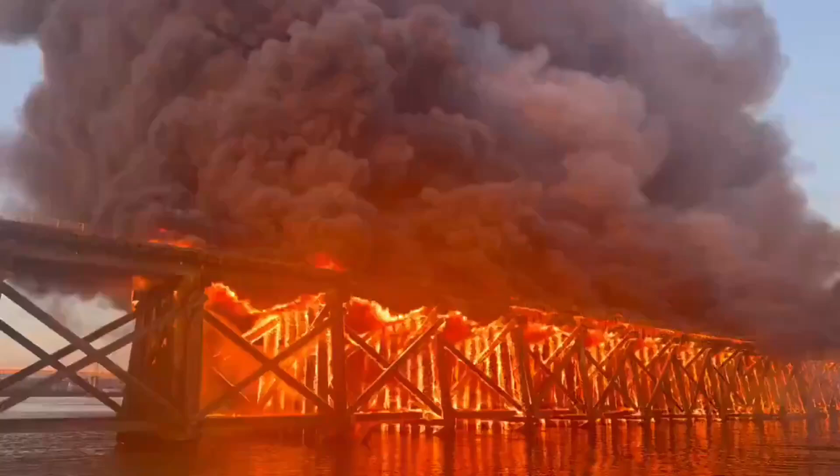From bridges cracking under pressure to collapsing in flames, these weren't unpredictable. They were preventable.

You won't believe what's waiting at number 5: a critical U.S. bridge built with a fatal engineering flaw that experts had warned about for decades, but it was ignored to save money. And number 6? It's the deadliest collapse on this list. One moment the bridge was there, the next, a bus full of passengers drove straight into open air.

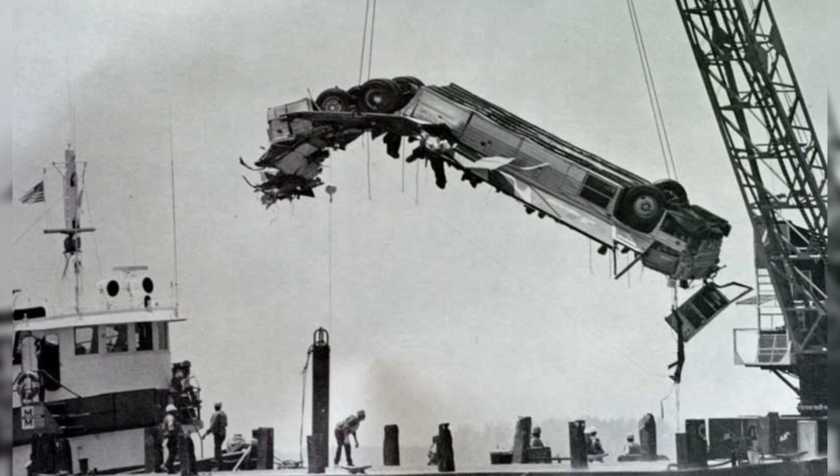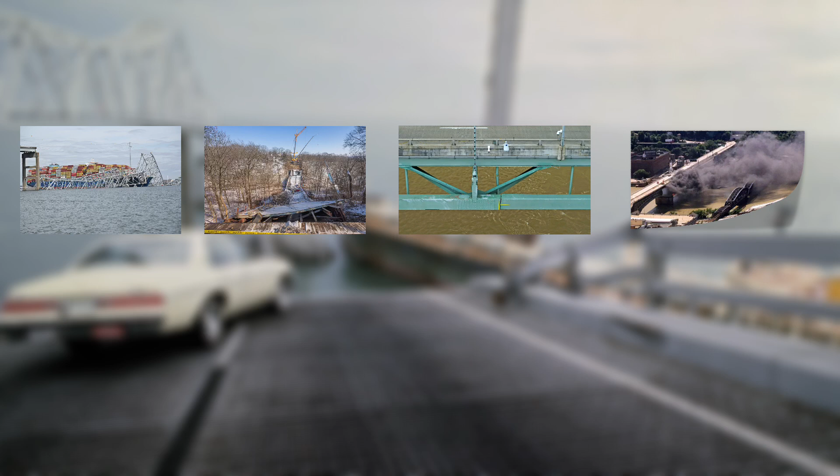When a ship crushed Baltimore's Key Bridge in 2024, one would have thought that we learned from that deadly 1980 bridge collapse. It is the latest in a disturbing pattern of U.S. infrastructure failures, failures that engineers warned about and were ignored. We'll break down 7 real-world bridge disasters in the U.S., examine exactly why they failed, and expose the systemic cracks in engineering, inspections, and accountability that continue to put lives at risk. This is more than a list. It's a wake-up call.

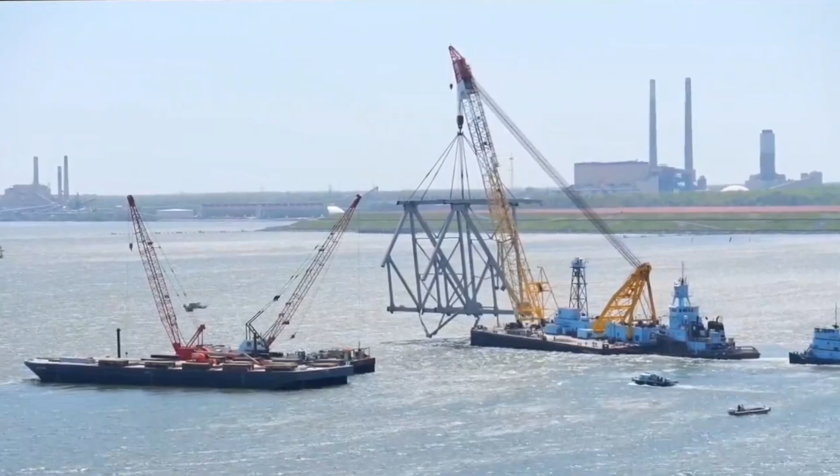The Francis Scott Key Bridge collapse, Baltimore, Maryland. It was just after 1:24 a.m. on March 26, 2024, when the container ship Dali, a 984-foot-long cargo vessel, experienced a full electrical blackout while exiting the port of Baltimore. With no power and no propulsion, the massive ship veered off course and slammed into one of the main support piers of the Francis Scott Key Bridge.

What followed was total structural failure. The bridge collapsed in a matter of seconds. Surveillance footage captured the horrifying moment as the structure folded into the Patapsco River like matchsticks. At the time of impact, a crew of 8 construction workers was repairing potholes on the bridge. Only 2 survived.

The Key Bridge wasn't some minor overpass. It was a 1.6-mile steel continuous truss bridge that had served as a vital artery for over 45 years, connecting Baltimore's port traffic to the I-695 Beltway. Built in 1977, it handled roughly 11 million vehicles annually. But despite its size and importance, its defenses were tragically outdated.

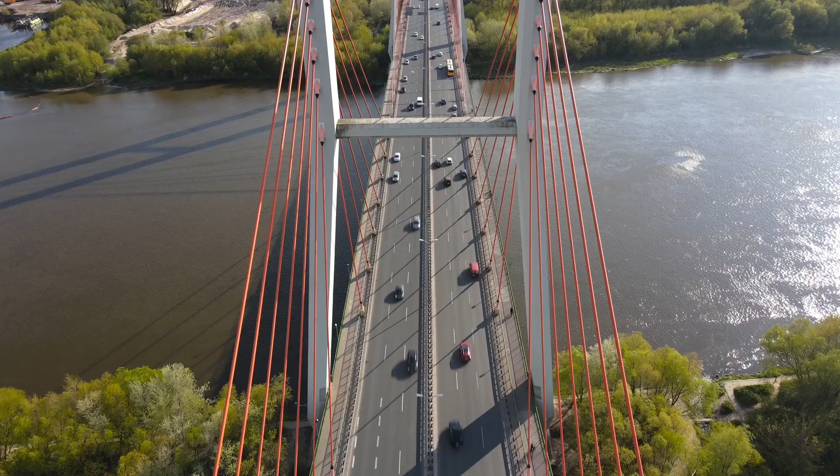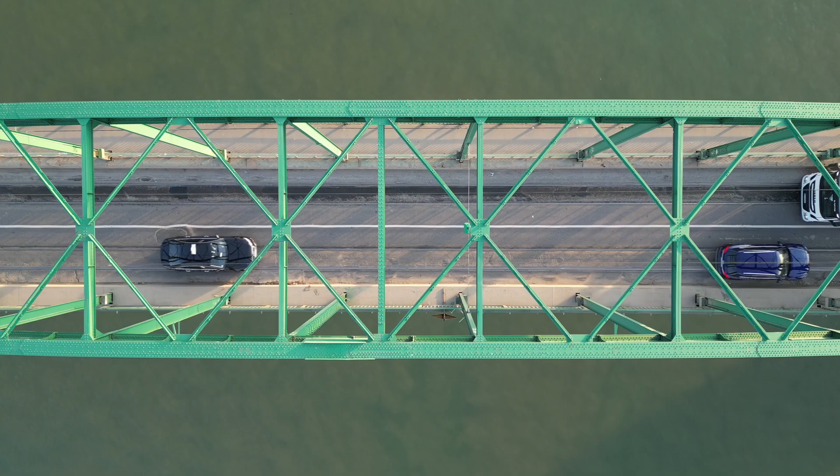Unlike many bridges in busy shipping corridors, the Key Bridge's support piers lacked marine fender systems, heavy-duty structures made of steel, concrete, or wood that surround piers and absorb the force of ship impacts. Ports like Tampa, New York, and San Francisco upgraded their bridges years ago. But in Baltimore, no such retrofit had been funded. This collapse wasn't an anomaly. It was the result of inaction, and one that cost 6 lives.

Fern Hollow Bridge collapse, Pittsburgh, Pennsylvania. It was a quiet Friday morning in Pittsburgh when everything gave out. At 6:39 a.m. on January 28, 2022, the Fern Hollow Bridge, a 447-foot-long structure crossing over a wooded ravine in Frick Park, suddenly collapsed without warning. A city bus, 5 passenger vehicles, and thousands of pounds of steel and concrete plummeted nearly 100 feet into the valley below. 10 people were injured, including the bus driver and several passengers.

The only thing that prevented fatalities was the timing. Rush hour hadn't yet peaked. The structure, opened in 1970, was a rigid steel frame bridge, a design that relies heavily on its legs and cross-bracing for stability. But by 2022, that same steel had been corroding for years.

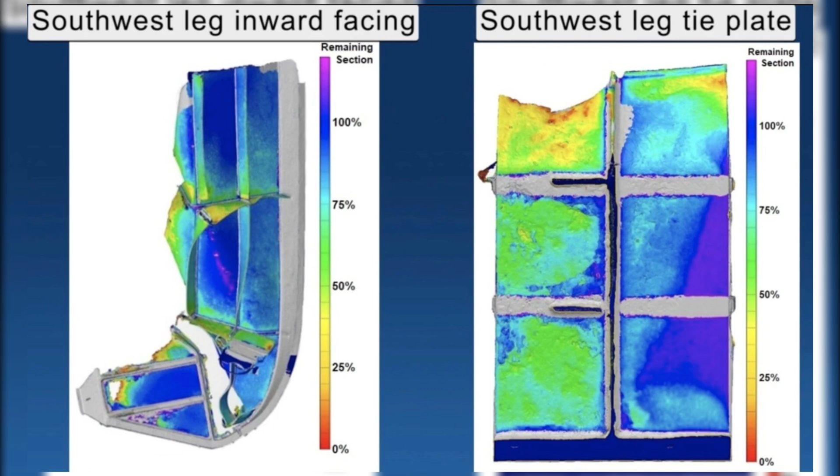Inspection records showed the bridge had been rated poor as far back as 2011, and that rating remained unchanged for over a decade. The NTSB's final report revealed just how close this bridge had been to failure for years. Critical load-bearing legs were severely rusted, and some connection plates had deteriorated to the point of detachment. Water intrusion, poor drainage, and a lack of consistent non-destructive testing allowed the decay to continue unnoticed, or worse, ignored.

What made the collapse especially damning is that the bridge had undergone routine inspections. It was last checked just 4 months before it failed. Yet without advanced tools like ultrasonic scanning or internal stress sensors, inspectors missed the most dangerous flaws. The bridge literally failed in its legs. These are the kinds of failures that can and should be caught.

Jennifer Homendy, NTSB chair: This wasn't some unpredictable fluke. Engineers had raised concerns for years, but the warnings were met with silence.

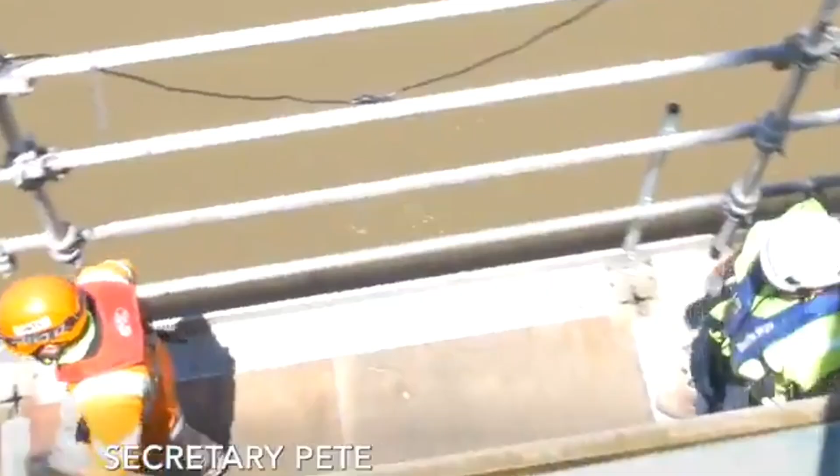Hernando de Soto Bridge crack, Memphis, Tennessee. On May 11, 2021, a routine inspection of the Hernando de Soto Bridge over the Mississippi River revealed something terrifying: a massive, 2-foot-long crack in a key load-bearing member. The fracture was found in a steel tension tie girding the central arch, one of the critical elements holding up the entire 3,800-foot structure. This wasn't just a small oversight. It was a near disaster.

The Hernando de Soto Bridge is a tied-arch bridge completed in 1973, carrying over 40,000 vehicles a day between Tennessee and Arkansas. The cracked component was a tension tie, a member that literally holds the arch in place under load. Had it failed completely, the result could have mirrored the I-35W collapse in Minneapolis, a full structural failure during peak traffic.

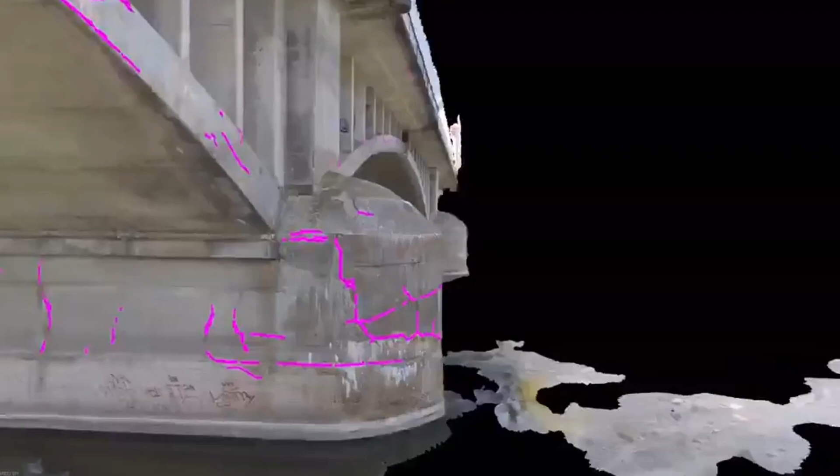The Tennessee Department of Transportation called it a near catastrophe. The NTSB later concluded that inadequate inspection procedures and human error were to blame. The event became a wake-up call. State DOTs across the country began rolling out drone-based inspections and AI-assisted crack detection to reduce human oversight failure. But the fact that such a large, obvious fracture went unnoticed for years revealed deep flaws in America's infrastructure monitoring.

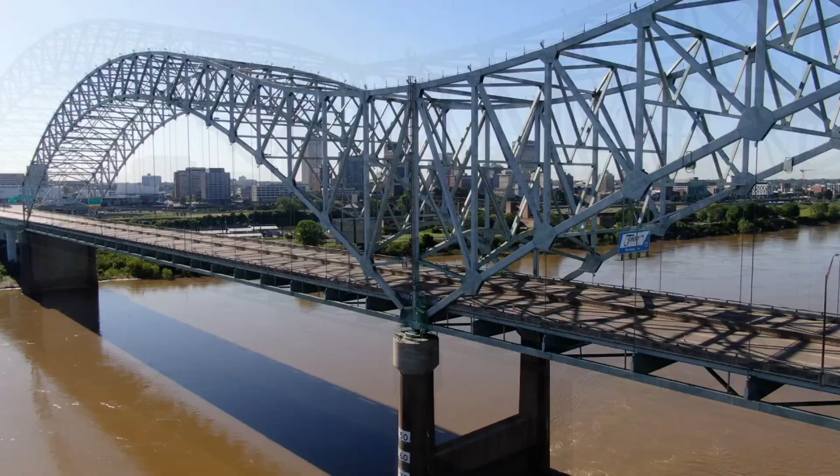It wasn't luck that saved this bridge. It was timing. Had it gone unnoticed a few months longer, the outcome might have made headlines for all the wrong reasons. The Liberty Bridge fire, Pittsburgh, Pennsylvania.

In September 2016, Pittsburgh came within inches of losing one of its oldest and most important crossings. The Liberty Bridge, a cantilever truss bridge built in 1928, spans the Monongahela River and funnels traffic directly into downtown Pittsburgh. It carries more than 50,000 vehicles daily.

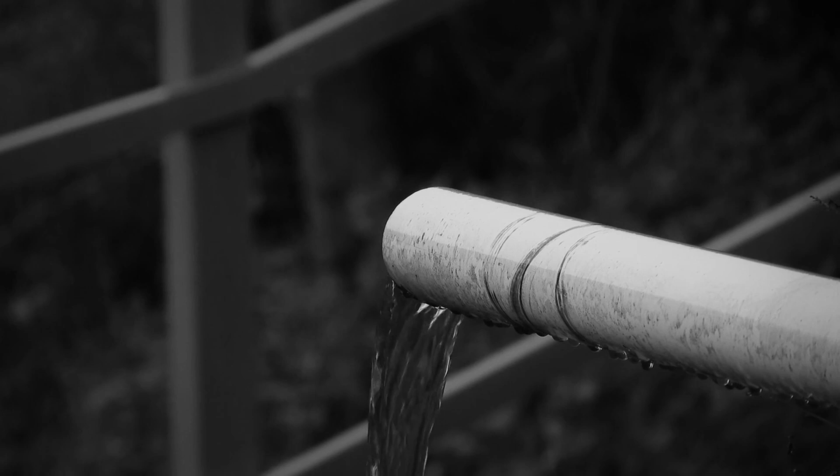But on September 2nd, during a routine rehabilitation project, a small oversight nearly triggered disaster. While contractors were using acetylene torches to perform welding work, sparks ignited nearby plastic ventilation pipes. The fire spread rapidly, creating intense localized heat that deformed a key steel tension chord, one of the elements responsible for keeping the bridge's span stable under load.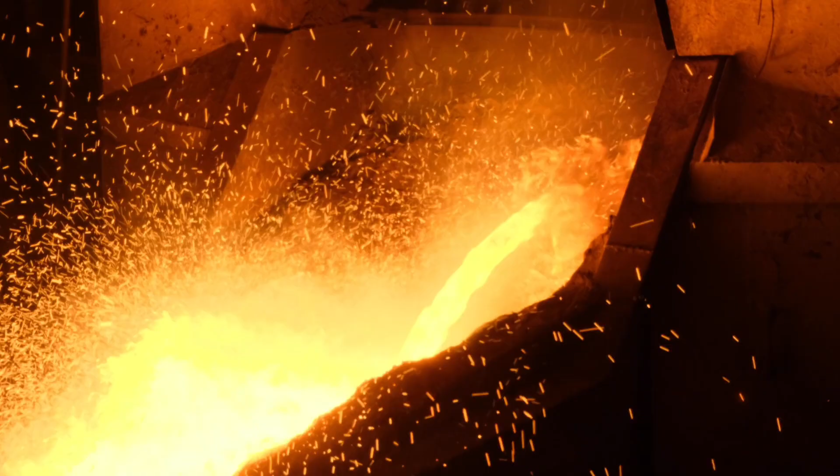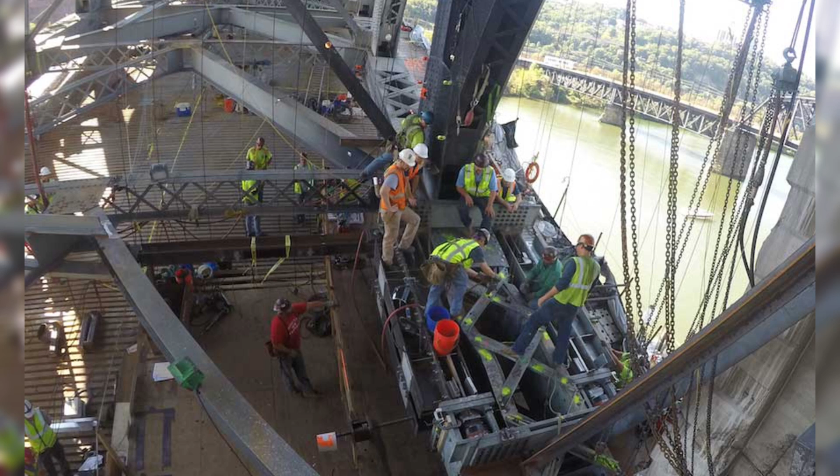According to PennDOT, the temperature reached levels high enough to warp steel. The bridge was immediately closed and underwent emergency repairs. Engineers installed a 9-ton steel brace to stabilize the damaged section while assessments were made.

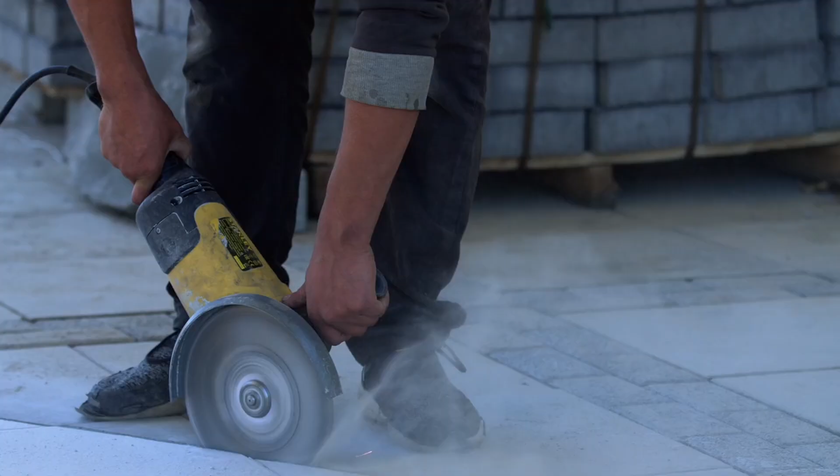The cost of the incident? Over $3 million in repairs, 24 days of emergency closure, and tens of thousands of daily traffic disruptions. But what's more concerning is what caused it: poor job site controls. Flammable materials had been stored too close to active torching, and there were no thermal shields in place, a violation of standard safety protocols.

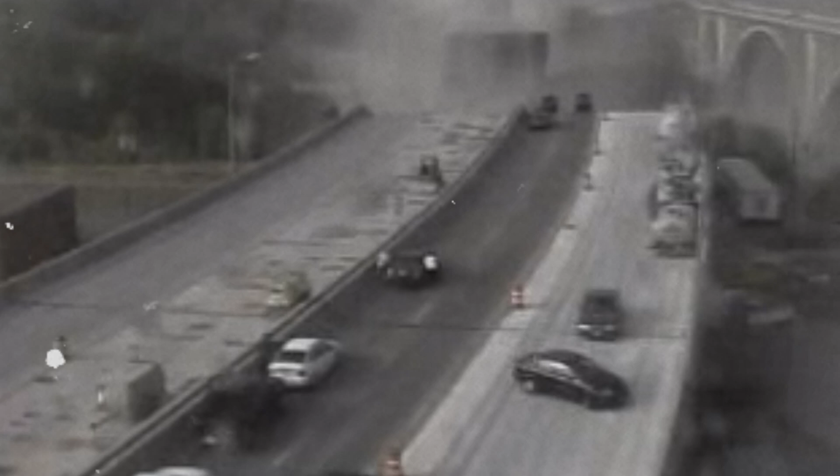The I-35W bridge collapse, Minneapolis, Minnesota. On August 1, 2007, just after 6 p.m., one of the busiest commuter bridges in Minnesota, the I-35W bridge over the Mississippi River, suddenly gave way.

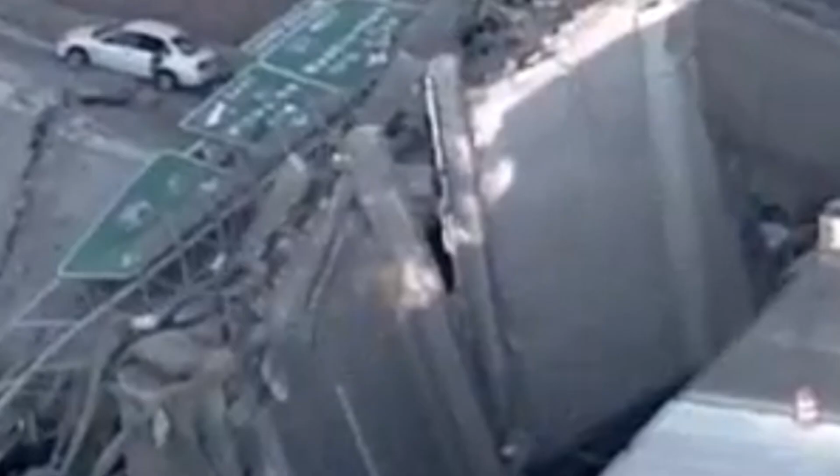8 lanes of rush-hour traffic fell into the river, along with construction workers, vehicles, and equipment. 13 people were killed, another 145 were injured. It remains one of the deadliest bridge collapses in modern American history.

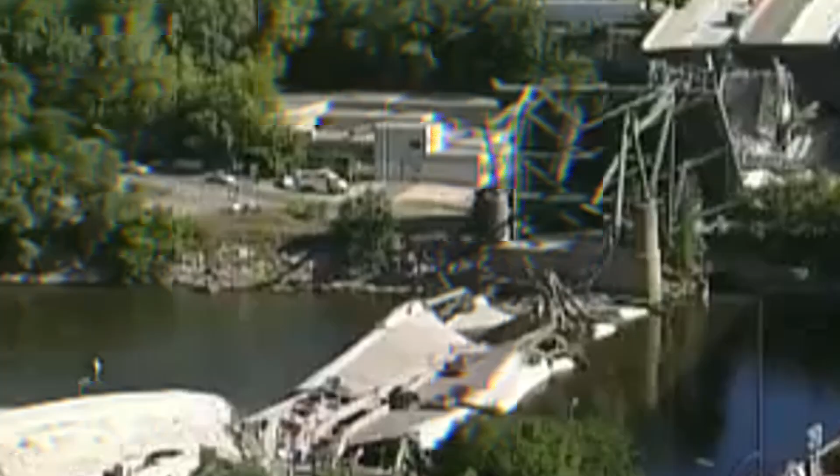At first, many assumed it was just another case of aging infrastructure. The bridge, after all, had been built in 1967 and was already 40 years old. But as investigators from the NTSB and independent engineering firms dug into the details, a much more unsettling truth emerged.

The collapse was caused by a fatal design flaw. The gusset plates, flat steel connectors at key structural joints, were too thin. At just half an inch thick, they were half the recommended size for the loads the bridge was carrying.

The structure was what engineers call fracture critical, meaning it had no redundancy. If one key component failed, there was no backup to transfer the load. The bridge didn't collapse because of a single event. It collapsed because of a silent accumulation of stress on a hidden flaw, a flaw that had existed since the day it was built.

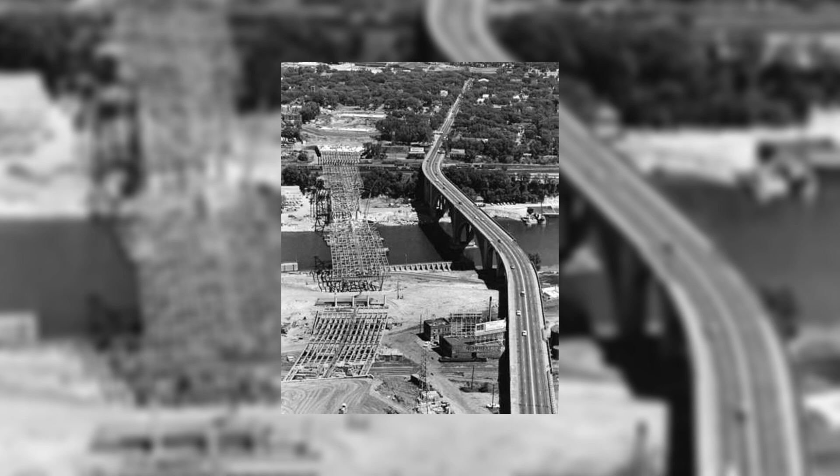The disaster led to a national reevaluation of fracture-critical bridges. But it also exposed the cost of cutting corners in design and the dangers of ignoring warning signs until it's too late. Sunshine Skyway bridge collapse, Tampa Bay, Florida.

On the morning of May 9, 1980, a sudden storm swept across Tampa Bay, reducing visibility to near zero. As the freighter Summit Venture made its final approach to the port of Tampa, it lost sight of the Sunshine Skyway bridge. Wind gusts exceeding 60 miles per hour pushed the ship off course. At 7:33 a.m., the freighter slammed into a bridge support pier at full speed.

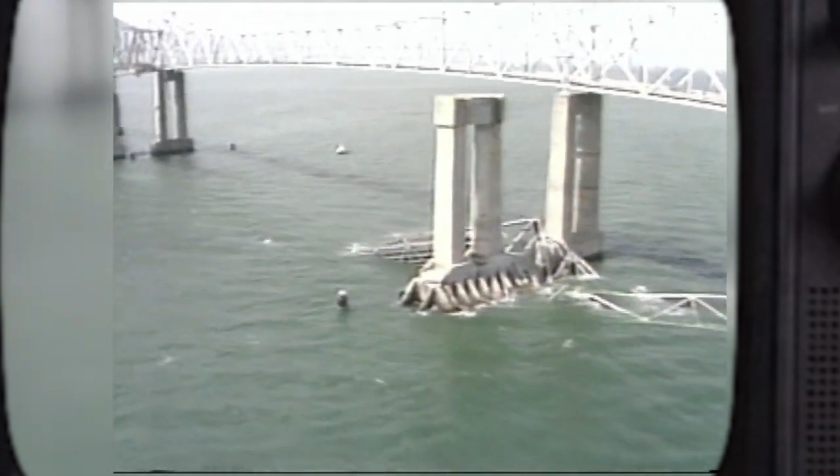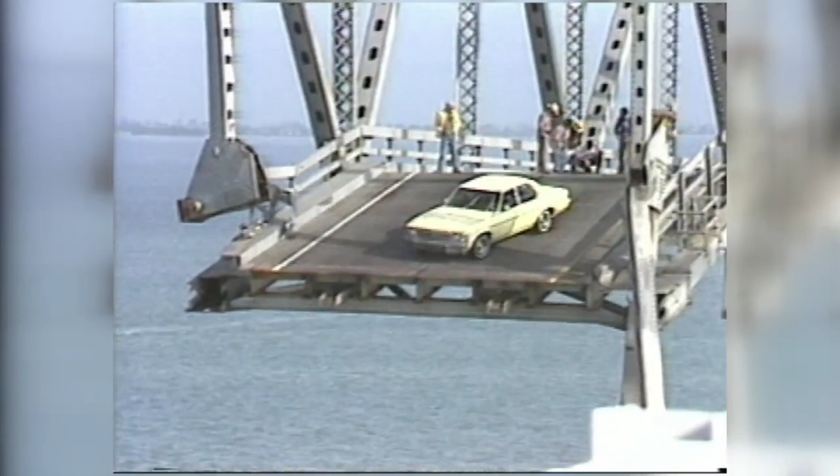A 1,200-foot section of the bridge collapsed instantly. Moments later, a Greyhound bus and several cars unknowingly drove off the severed edge of the roadway and plummeted 150 feet into the water below. 35 people were killed. Only one survived.

The Sunshine Skyway, built in 1954, was a cantilever bridge, a design that relies on long horizontal beams anchored only at one end. The pier that collapsed was unprotected. There were no reinforced barriers, no fendering system, and no advanced radar navigation tools to guide ships in low visibility. It was simply exposed. In the aftermath, public outrage was swift and massive.

The entire bridge was demolished and a new one was built, a modern cable stay design opened in 1987, featuring massive concrete fenders and improved ship detection systems. It became a textbook case in engineering circles for why maritime impact protection is essential.

BNSF rail trestle collapse, Tempe, Arizona. Just after 6 a.m. on July 29, 2020, a freight train rumbled across a wooden trestle bridge spanning Tempe Town Lake in Arizona. Moments later, the air filled with the sound of splintering timber and exploding metal.

The bridge, a patchwork of steel and century-old wooden supports, was on fire. 10 cars derailed, 2 of them plunged into the lake. One tanker car, carrying hazardous chemicals, ignited and sent a plume of black smoke over the city. Nearby residents were told to stay indoors. Local officials declared a Level 2 hazmat emergency.

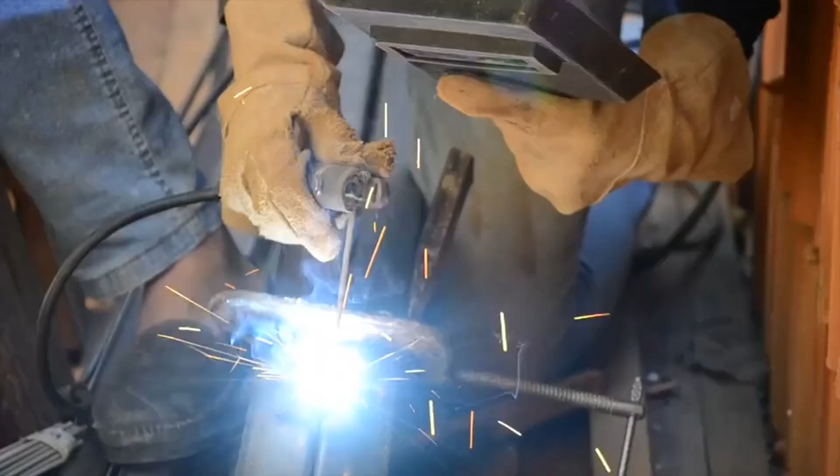The bridge itself had been built in 1912. That's not a typo, it was over 100 years old. While some portions had been reinforced with steel over the decades, much of its structure still relied on timber, a material especially vulnerable to heat, arson, and Arizona's extreme summer temperatures.

Investigators with the NTSB and Tempe Fire Department were never able to conclusively determine whether the fire was caused by accident or arson. But the risk was always there, and well known. Modernization remained on the to-do list, until it was too late.

The collapse forced a broader conversation across the freight industry. How many other 100-year-old structures are still quietly in service? And how many are one spark away from disaster?

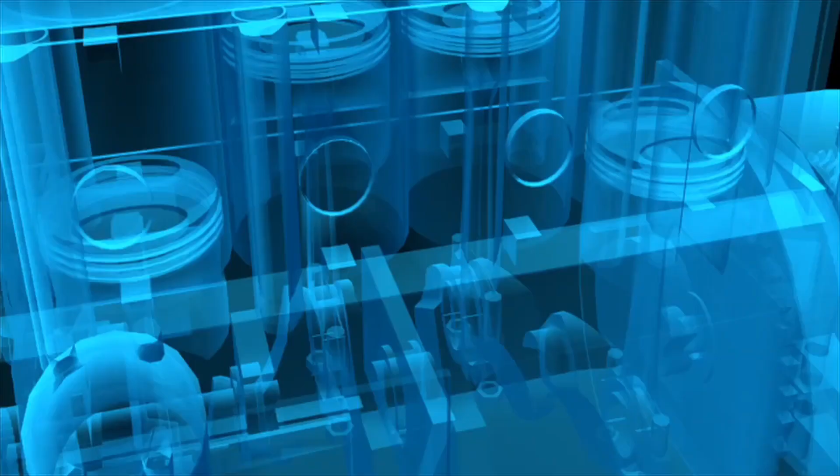Outdated inspection methods, deferred maintenance, under-engineered designs, critical upgrades postponed over budget constraints. The warning signs were there, documented, photographed, reported. But time after time, action came too late.

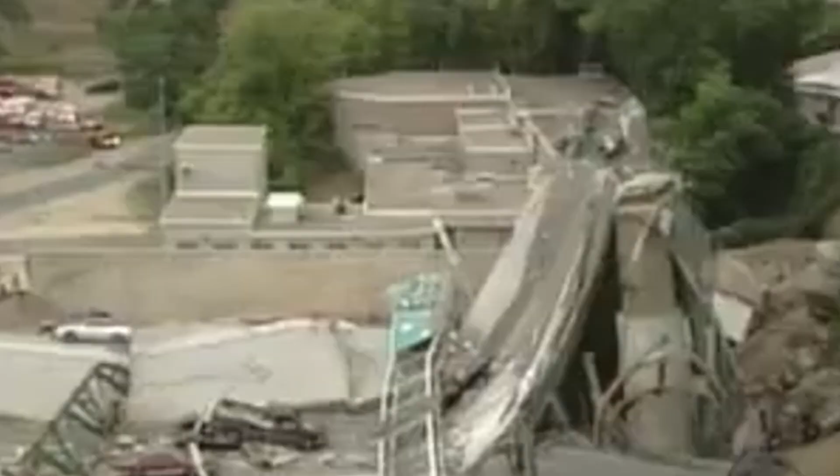In some cases, like the Hernando de Soto crack, timing spared catastrophe. In others, like the Key Bridge or the Sunshine Skyway, lives were lost in moments that engineers had specifically predicted decades earlier. In the time it took the US to repair a single fracture in Memphis, China opened the 55-kilometer Hong Kong to Zhuhai-Macau Bridge, one of the longest sea crossings ever built.

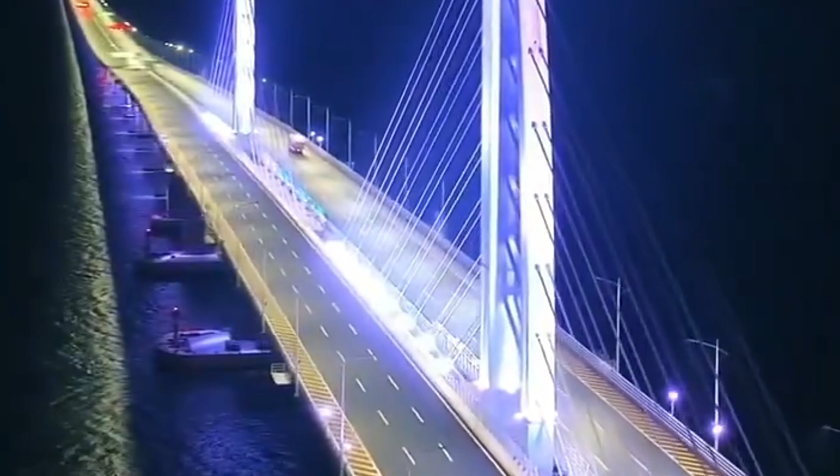They're not just building faster, they're embedding smart sensors, using AI for real-time stress analysis, and enforcing stricter standards for maritime protection systems, the very kind the Key Bridge lacked. America leads the world in GDP, but in critical infrastructure, it's falling behind. So how many more warnings will be ignored in the future?